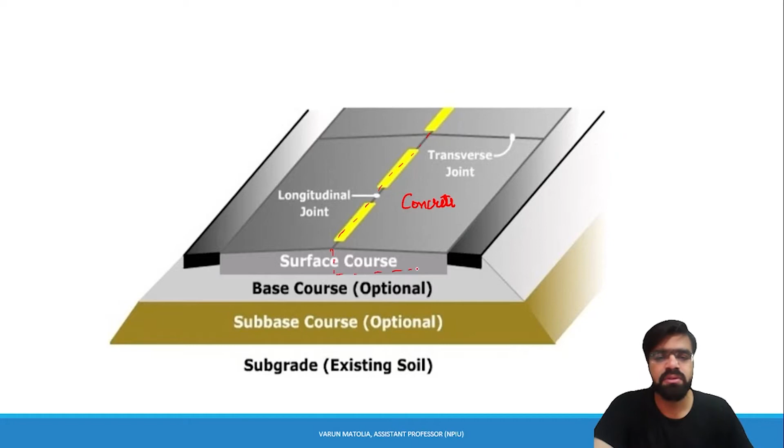The diagram which you can see here shows the rigid pavement. As you can see, a concrete slab is placed here. This is a concrete slab. It is placed over

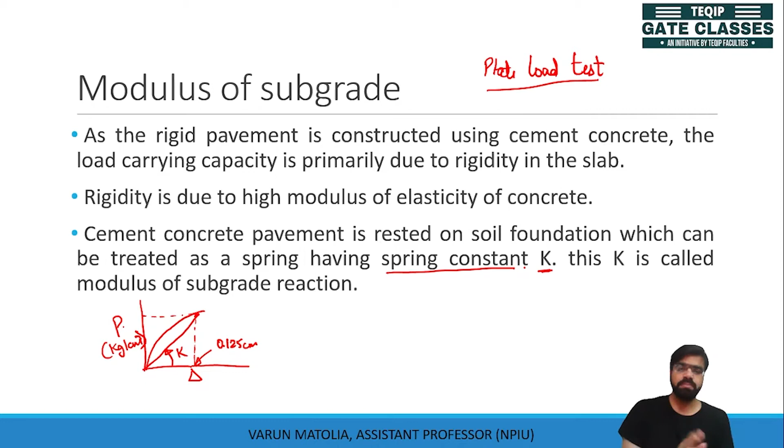This K value acts as a spring constant. We consider that our subgrade is a dense liquid and we consider it as a spring. If you apply load, there will be deflection. So what is the spring constant of the spring? This is denoted by the K value, which is known as modulus of subgrade reaction.

Now this K value can be calculated as P divided by 0.125. The unit of this K is kilogram per cubic centimeter. So this is what K is, modulus of subgrade reaction. This is a very important parameter and we will use this parameter in design of rigid pavement.

We have already seen different characteristics of this parameter in plate load test. We know that plate load test is done on a 75 centimeter diameter plate. If we use a different diameter plate, how can I calculate this K value for that different diameter plate? These things I already know from plate load test. If you want to revise, you can go back to the lecture and revise it, then come back here to use this parameter in design of rigid pavement.

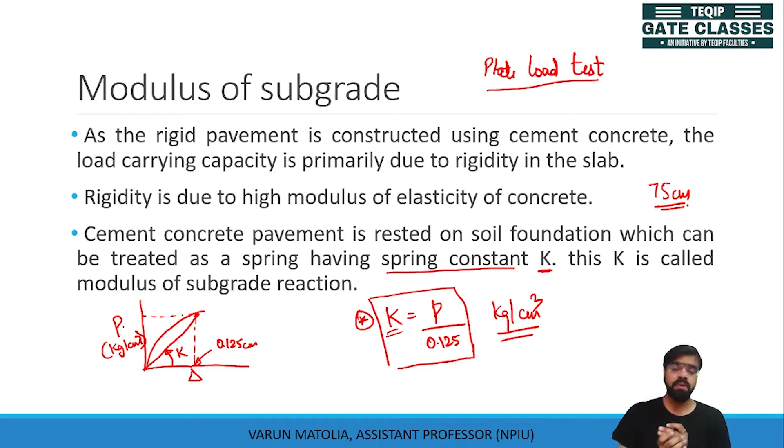Then another parameter is radius of relative stiffness.

It is considered that whatever deformation is occurring in the slab is equivalent to the deformation on the subgrade. Jitni deformation subgrade ke upar ho rahi hai, utni hi slab ke upar ho rahi hai.

So the relation between these characteristics is defined in terms of relative stiffness. The relative stiffness of slab with respect to subgrade is represented by radius of relative stiffness, and the radius of relative stiffness value is here.

We know that stiffness of slab can be represented by this formula. If we compare it with, or equate it with this stiffness value, then we can get the radius of relative stiffness. So L will be equal to EH cube divided by 12K into 1 minus mu square, raised to power 1 by 4. Here what is E?

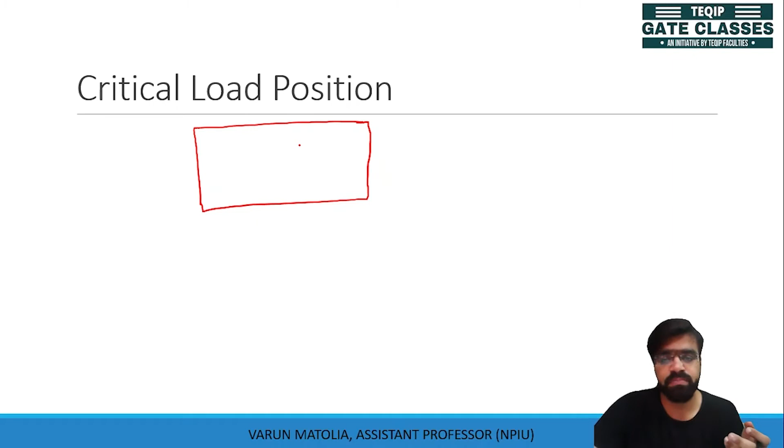In the interior, there are few locations. First one is the interior of the slab, there will be certain kind of load which will be maximum. Then there are edges and corners. Their critical positions or critical load positions are: interior loading, edge loading, and corner loading. So we will consider these three locations for calculating the critical stresses, and using those critical stresses we will design our pavement.

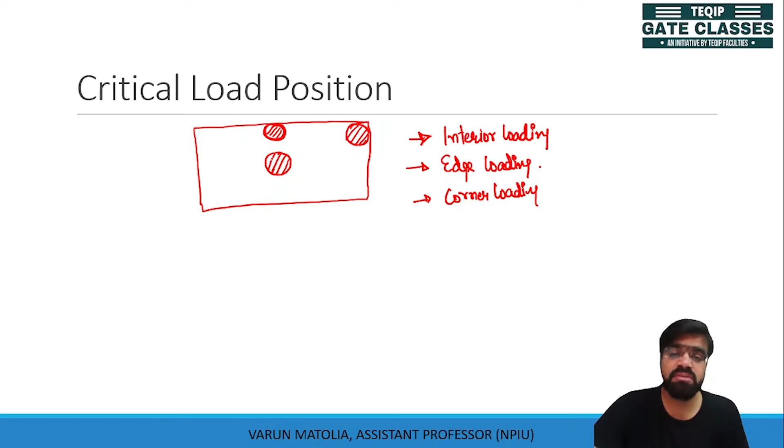As we see in the pavement, there is only a small area which resists the bending moment. So this small area which resists the bending moment is defined in terms of radius of resisting section. So the radius of resisting section, another parameter which we will use in design of rigid pavement, is defined in terms of B.

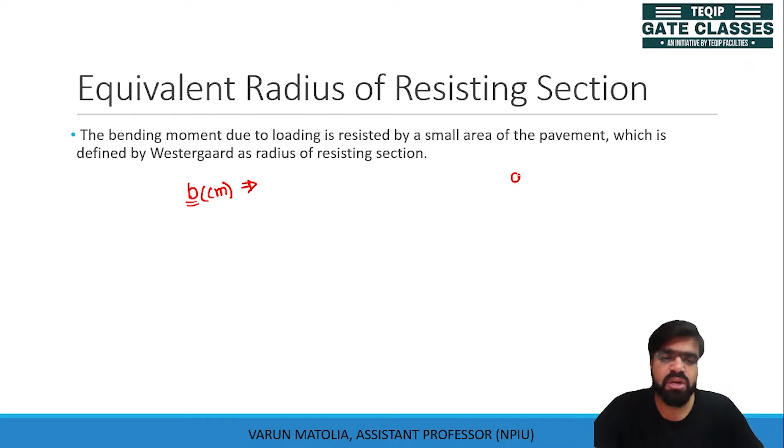This radius of resisting section depends on your radius of contact area. If this radius of contact area is less than 1.724 times your thickness of slab, then we will use this first formula, which says it equals 1.6 a square plus h square, minus 0.675 times h. If it is not the case, means if a is equal to or more than 1.724 times h, then your radius of resisting section will be equivalent to your a value.

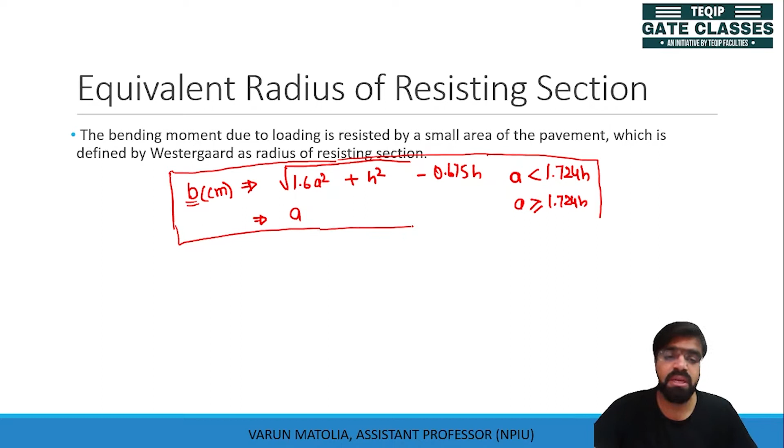This is another important parameter which you should remember. There will be direct questions on these parameters. You may have an a value and an h value, and you will be asked to calculate your radius of resisting section. So first you need to check whether your condition lies in this category or this category. Whatever the category, you can choose the formula and calculate the radius of resisting section.

Now let us discuss about the stresses. What type of stresses do we see in a pavement? There are two types of stresses. One is vehicular stress because of the wheel load. Another one is climatic stress because of the change in temperature.

The temperature change may be observed daily, as daily temperature variation. This means there will be higher temperature on the top surface in the daytime, and in the night time there will be comparatively low temperature on the top surface as compared to the bottom surface. So this creates a temperature differential between your pavement top surface and bottom surface. Because of this differential, there will be differential stresses, meaning different stresses.

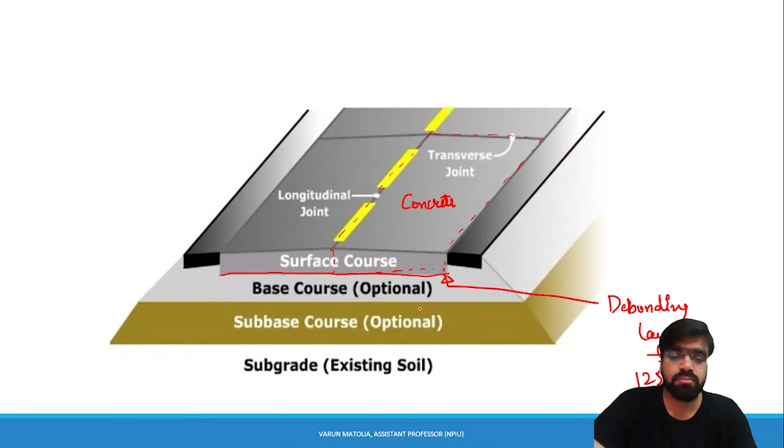Warping stress is because of the daily temperature variation, whereas we know that in summer the temperature is comparatively high versus winter. So there will be temperature variation in terms of seasons, and that is known as frictional stress.

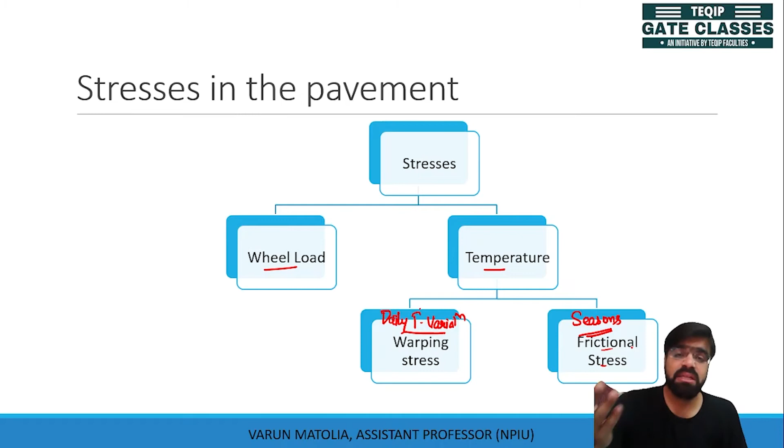Now we have considered that there are three critical conditions: interior, edges, and corners. Let us discuss the load condition if wheel load is applied here. Let us first consider the interior point. If load or wheel is applying the load here, this beam will bend this way. Here you can see, because of this bending, there is compression on the top and tension on the bottom.

So we will say, because of your vehicular load, there will be compression on the top and tension on the bottom in the interior slab. What is the critical stress here? Compression is never a problem in concrete, but tension is. So we are looking at the tensile stresses which generate due to various load combinations.

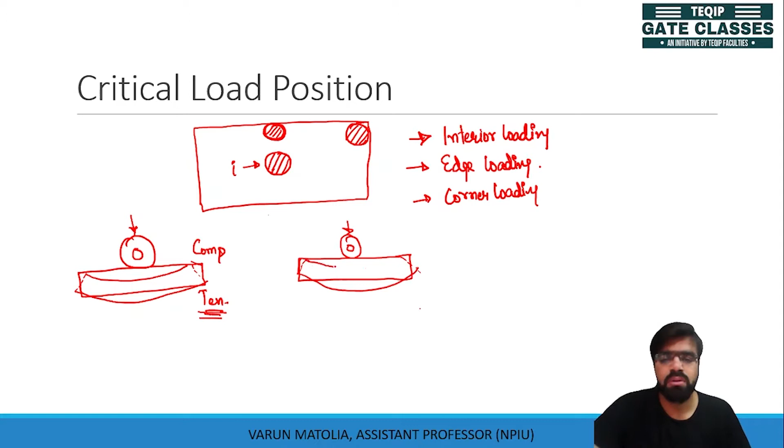Looking at the edge, if my wheel is at the edge, the scenario will be same: there will be bending, compression at the top and tension at the bottom. This is your interior area, this is your edges.

But at the corners, if wheel load acts on the corners, it will bend like this, similar to a cantilever, because they are not continuous, they are not held anywhere. So there will be tension on the top and compression at the bottom.

So in this case, we can see the compression and the tension, so we are looking at the tension value. This tensile stress can be calculated by these relationships provided by Westergaard.

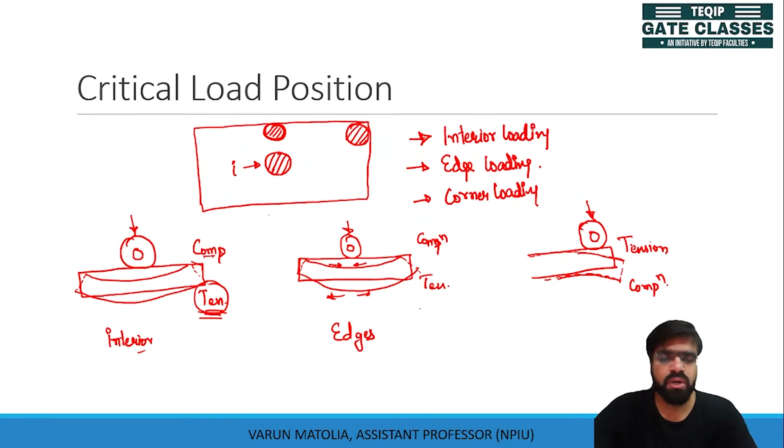Then at the edges, it is in the bottom surface. Why bottom? Because tension is at the bottom surface of the slab. The bottom.

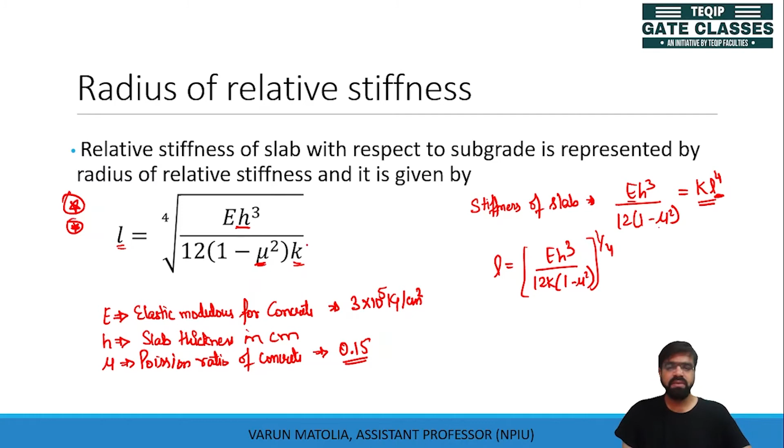We know that in this equation there is no modulus of subgrade reaction directly, but this value L uses the K value for calculation, the radius of relative stiffness. So how we will describe the relation between the modulus of subgrade reaction, in terms of L, with your stresses - this is important. So better you remember all these formulas so that these kind of relationships can be easily solved in your examination.

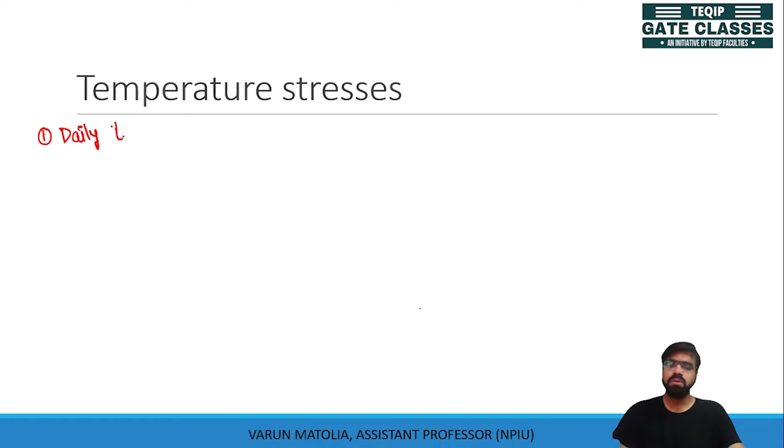Then there are temperature stresses. We know that temperature stresses are of two types. First one is your daily temperature stress, this is due to temperature differential at the slab surface. What happens is a slab, and it is daytime.

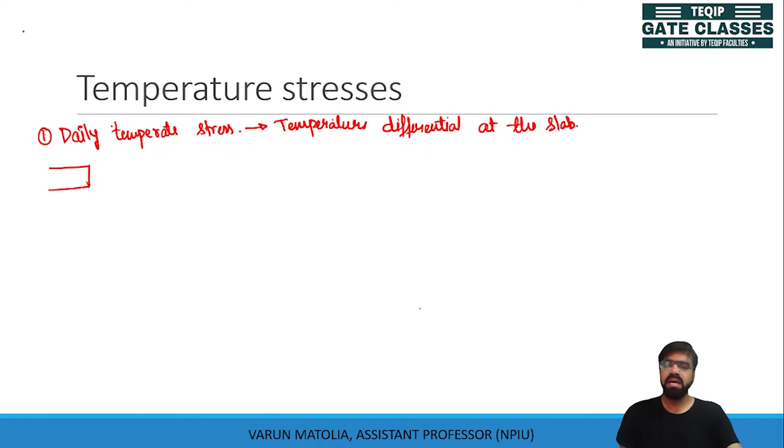Temperature at top will be higher because of the sun, and comparatively the temperature variation will look like this. There's T top temperature at the top, T bottom temperature at the bottom, and there is some difference in these temperatures, and the difference between T top minus T bottom is known as temperature differential. So because of this temperature difference from top to bottom, these stresses generate.

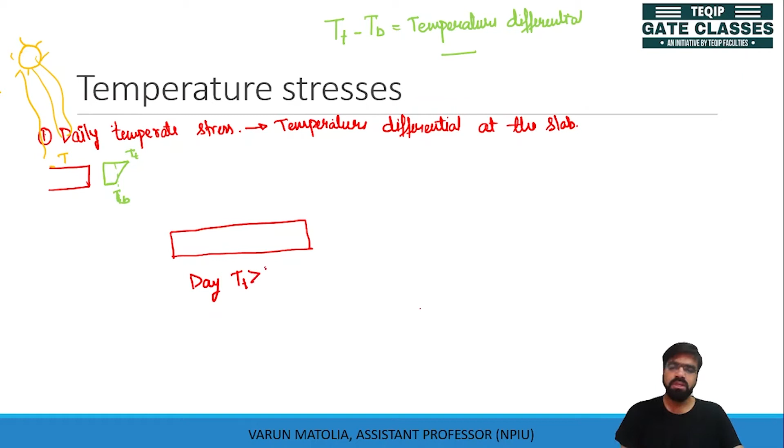Now let us see why these stresses generate. If I have a slab, let us say this is my slab, this is daytime. For this day, the temperature at top will be more than temperature at bottom. Where there is higher temperature, there is expansion. So at the top, there will be expansion. Comparatively, at the bottom, there will be expansion, but in less amount. So this beam will bend in the plane like this.

Because if it is higher temperature at the top, there will be more expansion at the top as compared to the bottom. So because of this shape, what my center would like to do is come back because of its weight, and because of this weight, resistance to this expansion occurs.

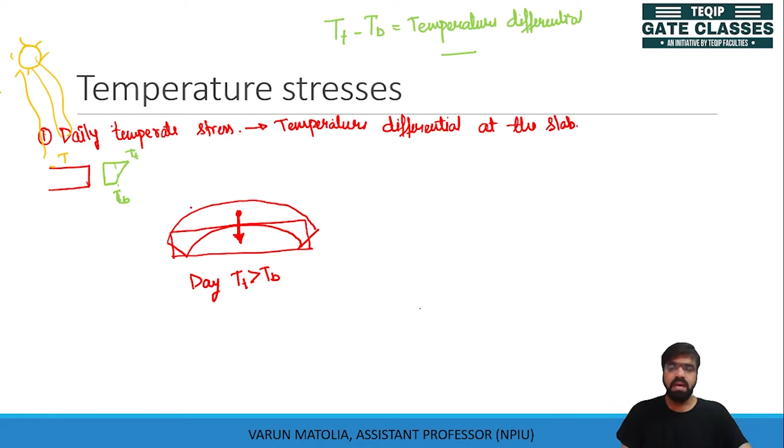There will be compression at the top. And at the bottom, there will be tension, because we want to get back to the original shape. So in a daytime condition, there will be compression at the top and tension at the bottom.

If it is night time, this slab has a reverse temperature gradient. The temperature at the top will actually be less than at the bottom. With the sun going down, the temperature at the surface will also decrease, but it will not affect directly the temperature at the bottom. The bottom temperature relative to the top will change slowly. Dheere dheere change hoga. As night time approaches and the sun reduces, the top surface temperature becomes lower compared to the bottom. Now what will occur?

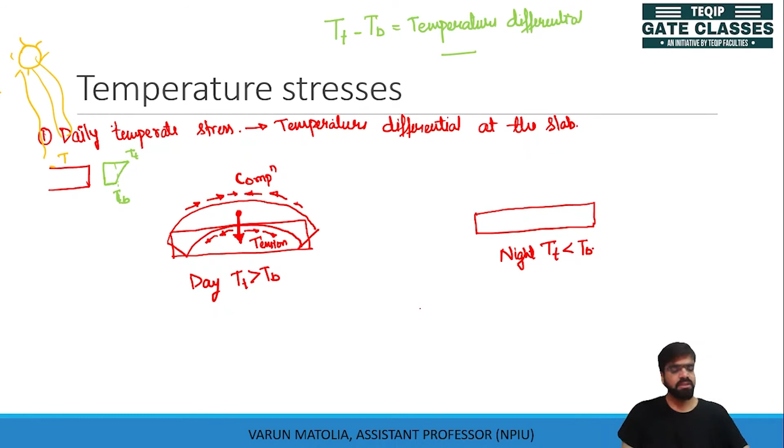The bottom will expand. How? The bottom will expand in such a way that it will form this kind of shape.

Because the temperature at the bottom is higher, the expansion at the bottom surface will be higher, and this will be resisted by the weight of this pavement. This weight will try to compress the bottom so as to bring it back to the original position, and will try to provide tension at the top. So there will be tension at the top and compression at the bottom.

These types of stresses, which are generated due to daily variation, are known as warping stresses.

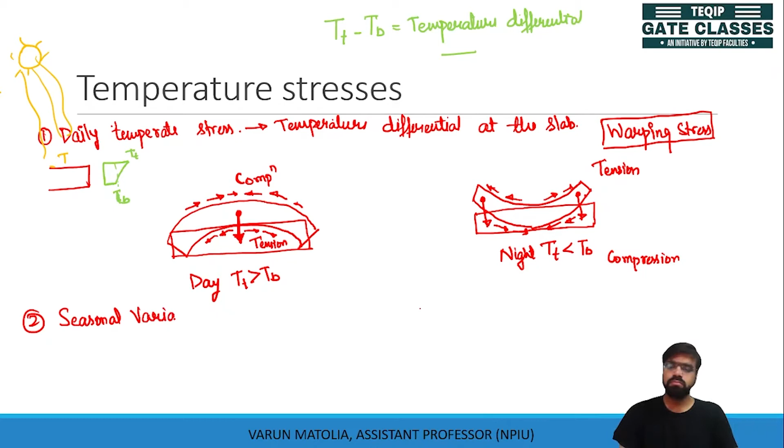The other type of stress which we see is due to seasonal variation of temperature. Here there is no differential in the slab. The complete slab will either expand or contract. There will not be any differential between the top surface and the bottom surface, but either compression or tension in the complete slab. Now let's look at why this compression or tension occurs.

This is my slab, placed over a granular surface. Now with increase in temperature, my slab will try to expand. So I am talking about summer. We know that summer has comparatively higher temperature, so in summer this slab will try to expand.

But as we have placed this slab on a granular material, there will be friction, and friction will try to stop this expansion. Whenever there is resistance in expansion, there is generation of stresses. The slab is trying to move out, but the friction is resisting it in the opposite direction. So there will be compressive stresses.

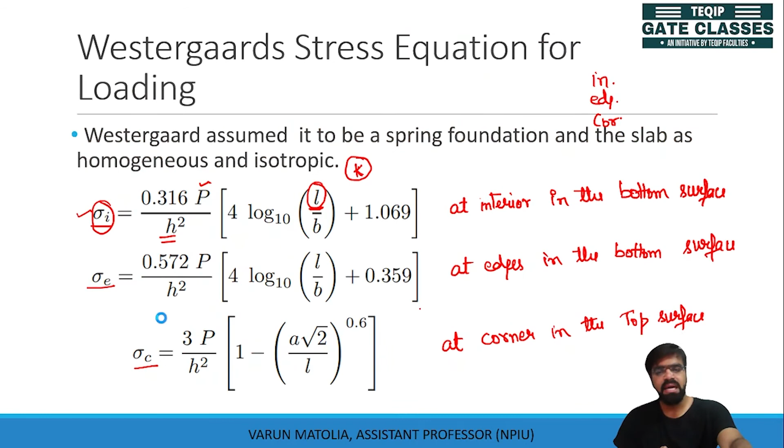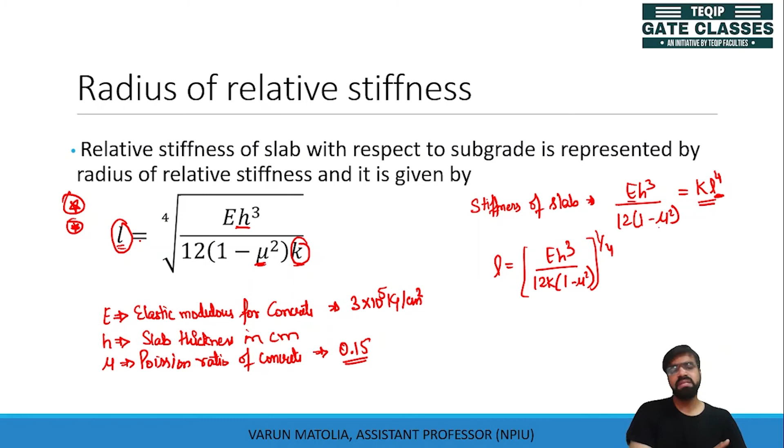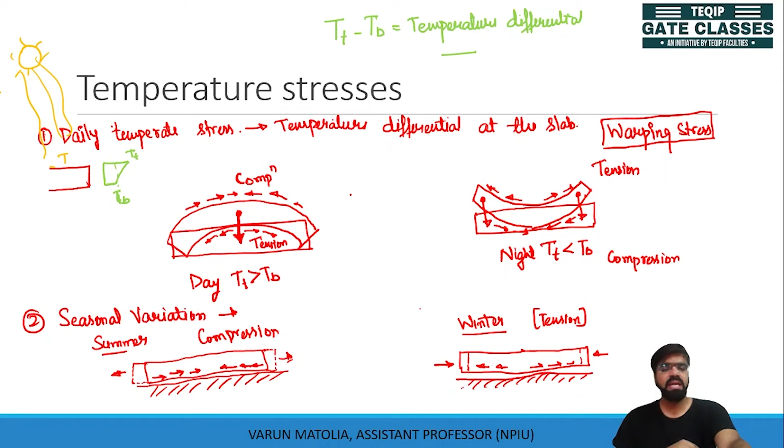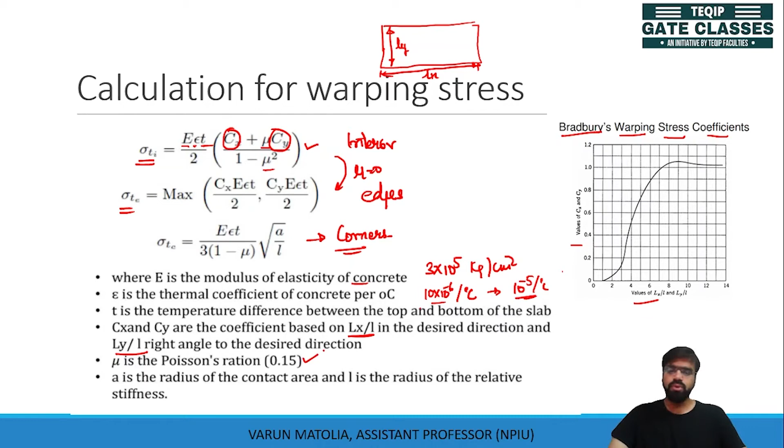You should remember that the value of Poisson's ratio is taken as 0.15. Now let's talk about the temperature differential. The maximum temperature differential occurs during the day in the spring and summer months, because the temperature at the top is very high while the temperature at the bottom is relatively cool. During midday in summer, the surface of the slab is exposed to sun and warms faster than the subgrade, which is relatively cooler. This creates a temperature differential.

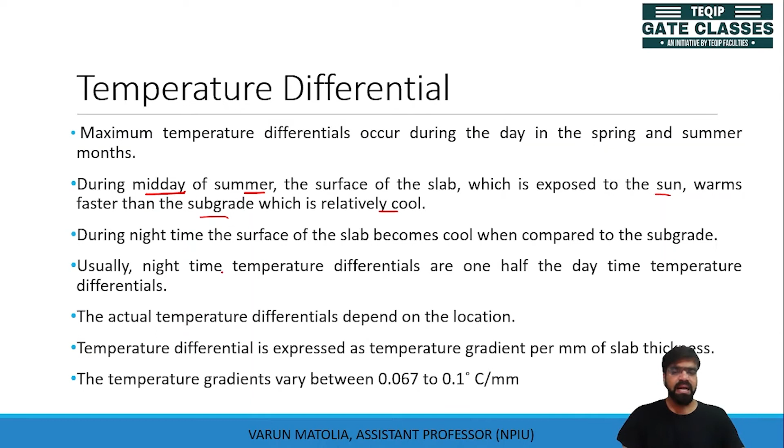At night the surface becomes cooler compared to the subgrade, and because of this variation there is a temperature differential. It is said that at night the temperature differentials are one half the daytime temperature difference.

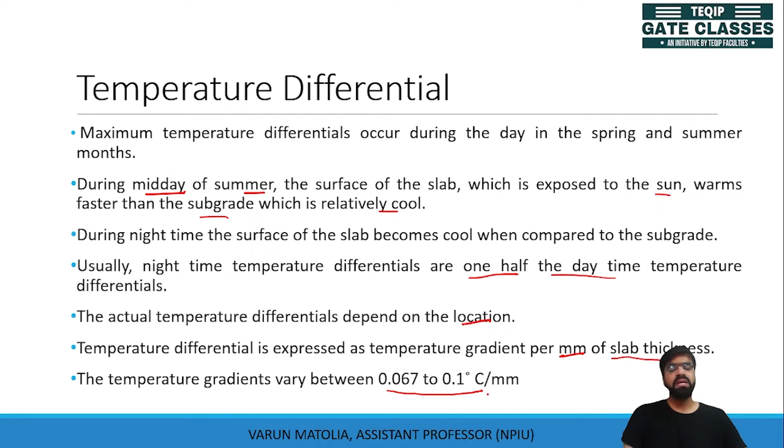The actual temperature differential depends on the location, because temperature variation also depends on the location. The temperature differential is expressed as temperature gradient per mm of thickness of slab, and it varies between 0.067 to 0.1 degrees Celsius per mm, for different thickness and different locations.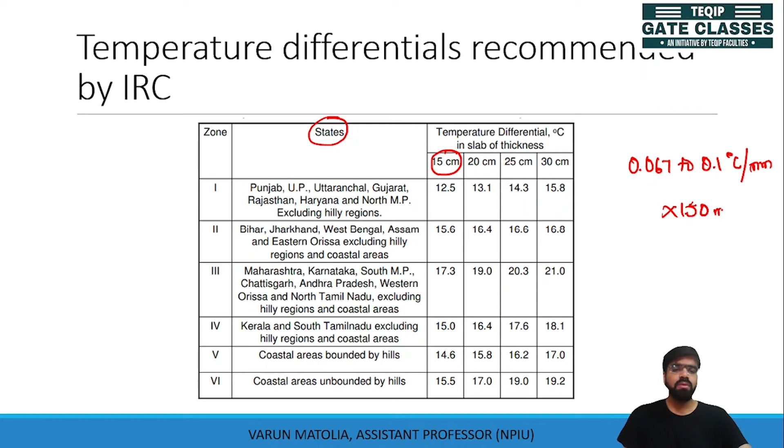For various thicknesses, we multiply this value by the thickness in mm, and we can get the differentials from the code. This provision is provided in IRC 58. We have the latest version, IRC 58 of 2015, so this design is based on IRC 58. For all the states and different areas, we have the temperature differential for different thicknesses of slabs, which will help you calculate the warping stress.

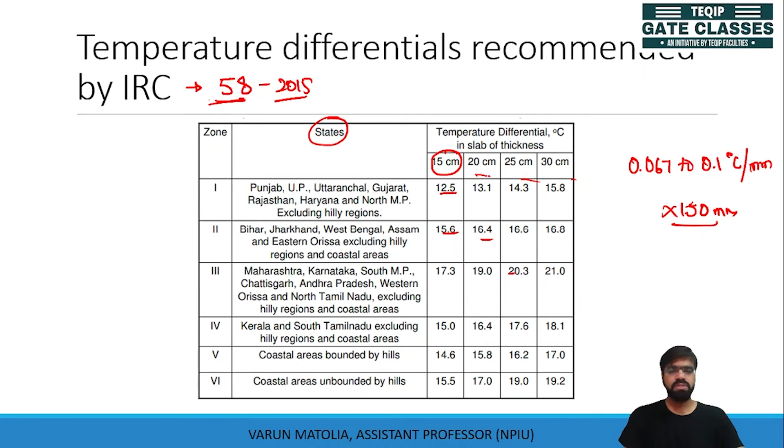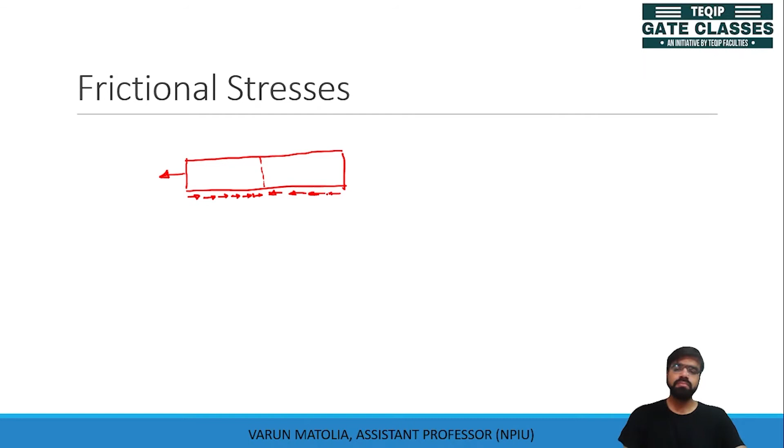Then there are frictional stresses, which we have already discussed. The slab, with increase in temperature in summer, tries to expand, but there is restriction. It wants to expand, but is restrained. For summer there are compressive stresses, and it is considered that these stresses are studied for half of the length, because the other half has a similar type of compressive stress.

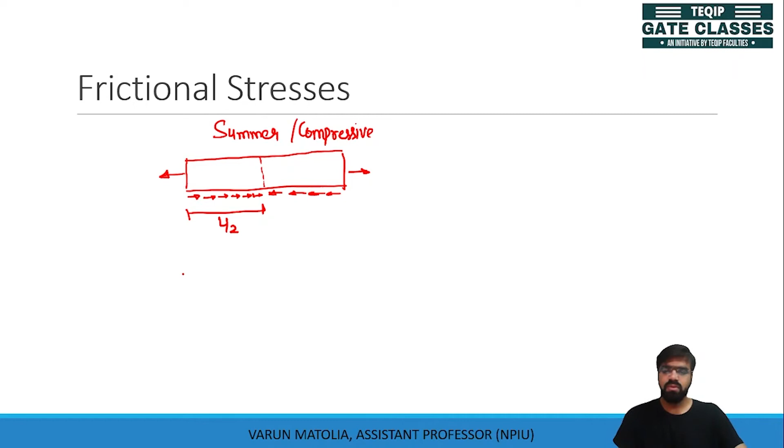This is due to the seasonal variation of temperature. Now, if we want to calculate this variation, we can say that the expansion or tensile stress in the pavement is actually equal to the friction applied. So the friction value can be given by M, and this is resisted by, or equivalent to, the strength of this section in tension.

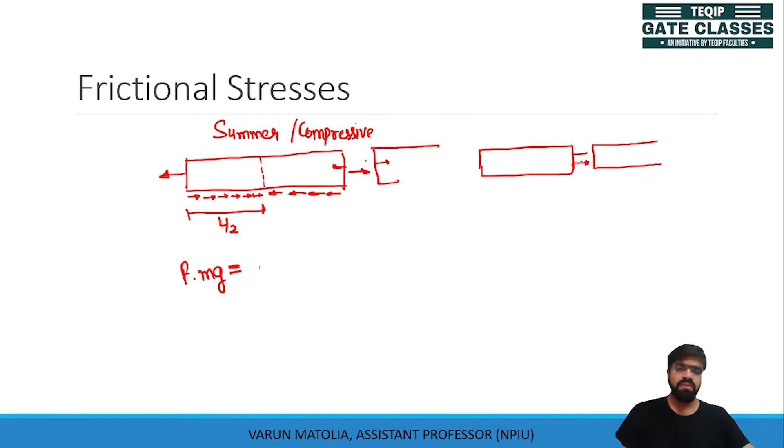If we consider this section, it will try to contract, and if there is another section nearby, it will also try to contract. In winter they contract, in summer they try to expand. So this expansion and contraction will generate tensile forces. The frictional resistance is equal to these tensile forces, or the tensile strength of the pavement, which is equal to the permissible tensile stress on the surface.

Here, the permissible tensile stress on the surface is multiplied by the surface area, that is, the width of the pavement. So the friction value is the friction coefficient multiplied by the total area, or the friction coefficient multiplied by the weight. The weight can be calculated by multiplying the volume with the unit weight. The volume is the width multiplied by the height multiplied by half of the length, and these are the stresses occurring here.

So this formula can be used to calculate the frictional stresses - frictional stresses in corners, in interior, and at the edges. We are very much interested in the tensile stresses, which occur during this.

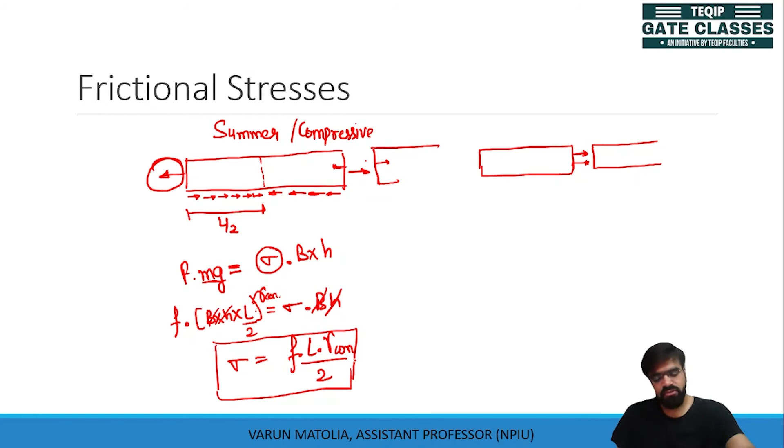When do these tensile stresses occur? These occur during the winters when the object or the pavement is trying to contract. That's why we provide contraction joints.

Now let us see various load combinations and find which combination is critical for design. Due to wheel load, we know that the interior has minimum stress because it is continuous in both directions, whereas corners, which have tension at the top, have maximum stress because of the discontinuity, and the edges have an intermediate range.

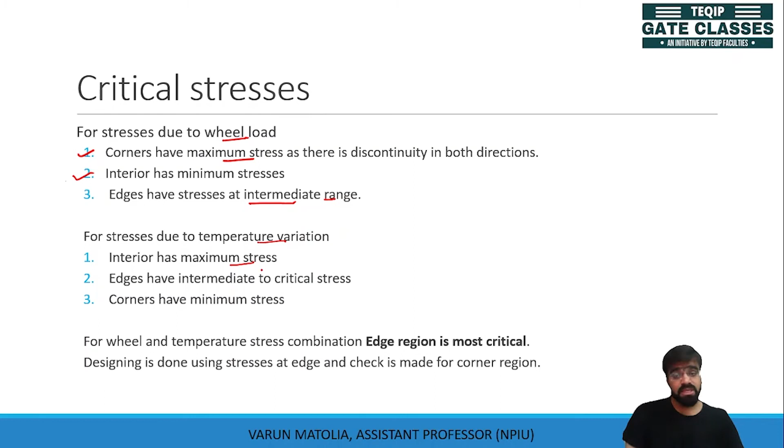While for temperature variation, the interior has maximum stress. The stress variation compared to temperature is like this: at the corners, the temperature stresses are usually close to zero, and at the interior it is maximum. So corners have minimum temperature stresses, and interiors have maximum temperature stresses.

So in order to design a pavement, we should consider the edge region because it has intermediate stress in terms of both temperature and wheel load. So we consider the combination of wheel load and temperature stresses to be critical for the edge region. We design it for the edge region, but we check it for the corner region so that all combinations are safe.

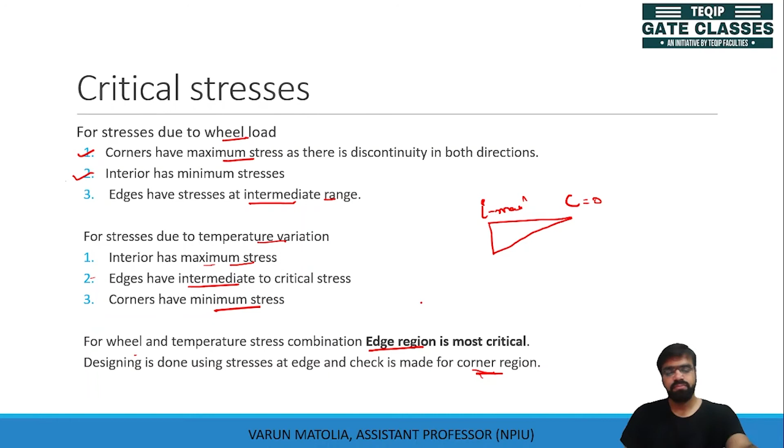Let us discuss various combinations and find out which combination is the most critical. For locations - edge, interior and corner - let us discuss the load stresses due to wheel load. At the edges, we know that at the top it is compression, at the bottom it is tension.

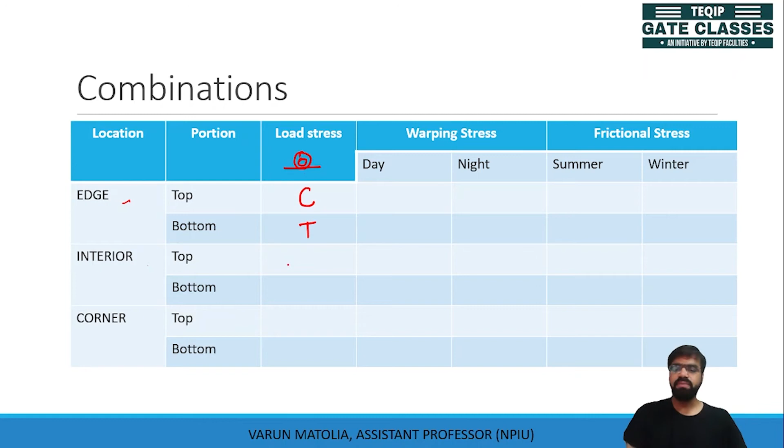Similarly for the interior, it is compression at the top and tension at the bottom. But for the corners, where it behaves like a cantilever, there is tension at the top and compression at the bottom.

For warping stresses at daytime, there will be similar stress on top for edge, interior and corner. At daytime, the top surface is expanded and the weight is trying to compress it. So we have compression at the top during the day in edge, interior and corner, and tension at the bottom.

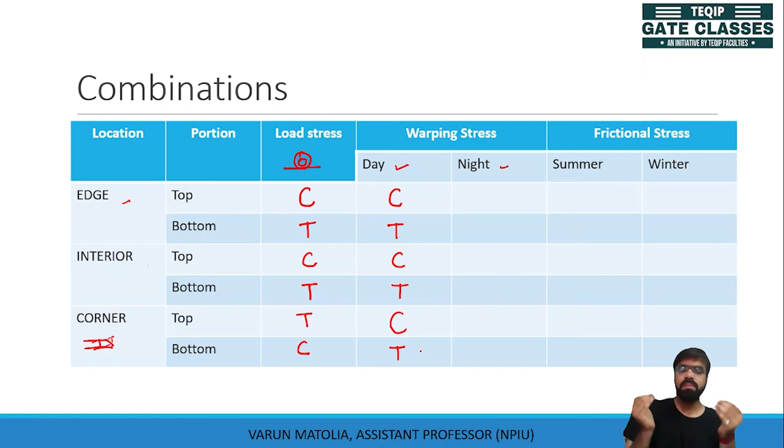At night time, we know that the temperature differential is reversed. The temperature is higher at the subgrade level and comparatively lower at the surface level. So at night, the top surface will have tension because the bottom is expanded, and it will be compressed because of the load. So there will be tension at the top, compression at the bottom, for edge, interior, and corner.

Frictional stresses are similar in all three areas. If the slab is trying to expand, the friction is trying to compress it. So for summers, there will be compression throughout. And for winters, there will be tension throughout.

So we need to find the load condition which is critical - we want to see where there is always tension. We also know that at corners there are no or very negligible frictional stresses, so we can ignore these values.

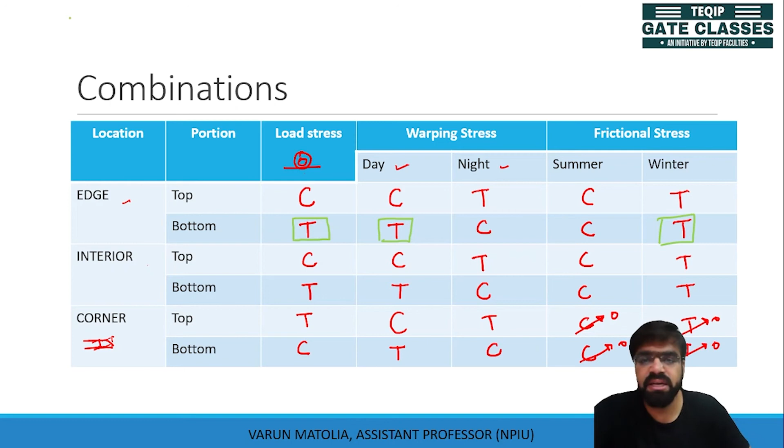And from these combinations, we can say that for edges, bottom, bottom, and bottom. So we can write that for interior and for edges, the critical load combination is this load stress at edge, at bottom, plus warping stress at day.

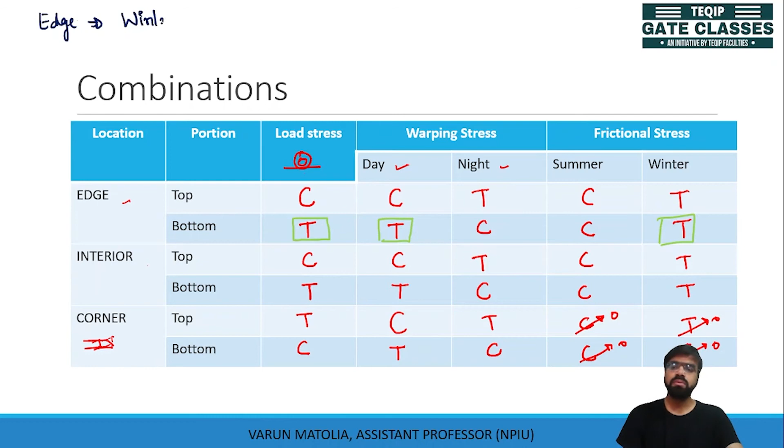Or we can write the combination for edge as a winter daytime stress will be critical. So this is the most critical combination for edges.

If we talk about the interior, the most critical combination is the same, in a winter's day. In a winter's day, there is tension at the bottom because of loading also. So this combination holds good for the interior portion too.

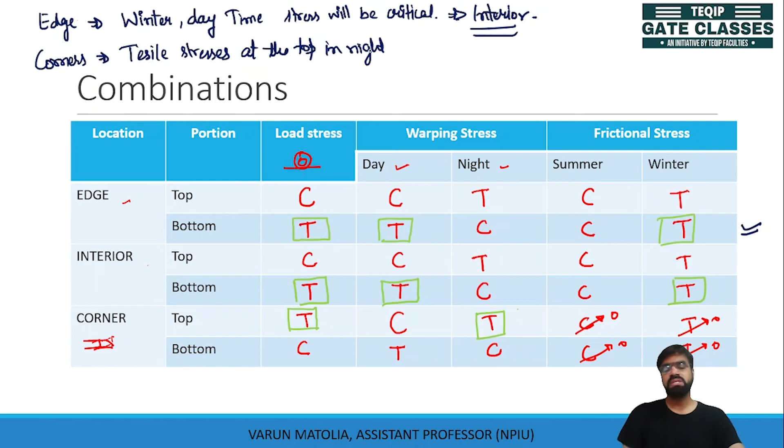Finally, for the corners, we have the critical combination as tension at the top in any night - corners have tensile stresses at the top at night. If you want to consider, you can say it is winter, but as the frictional stresses are negligible, you can ignore it and write this combination.

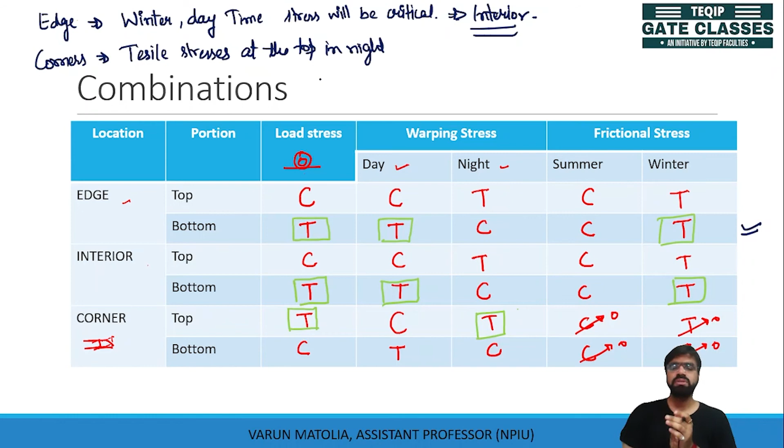In transverse joints, we have expansion joints, which are generally provided at around 140 meters.

Then there is a contraction joint, which are usually provided at a distance of 4.5 meters. And then there are construction joints. Whenever you stop the construction of a day and then begin the construction for next day, you provide a joint.

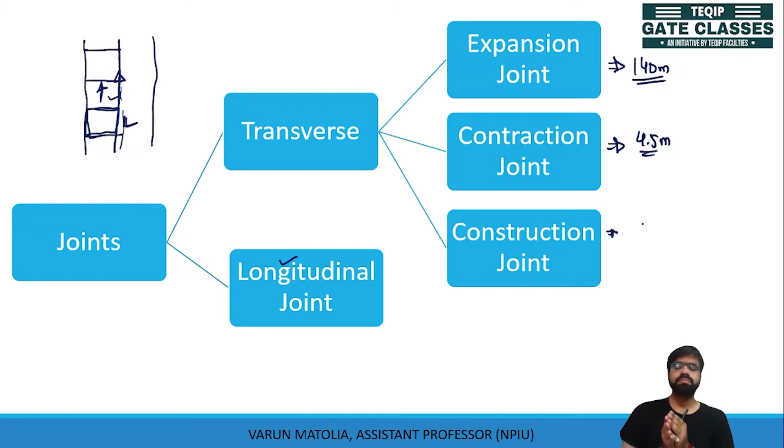Expansion joint provides you a cushion or space in order to allow the expansion of the slab. Expansion joints are designed such a way that it allows the expansion and allows the compression of the filler material into this joint.

Contraction joints are actually not proper joints. These are the locations where localization of cracks are done. We provide half a crack in the slab so that the cracks get generated from this point only, and fill this with filler so that the cracks generate at this location only, because somewhere there will be a crack. So let us provide a location where there should be a crack, and not allow any other location to generate a contraction crack.

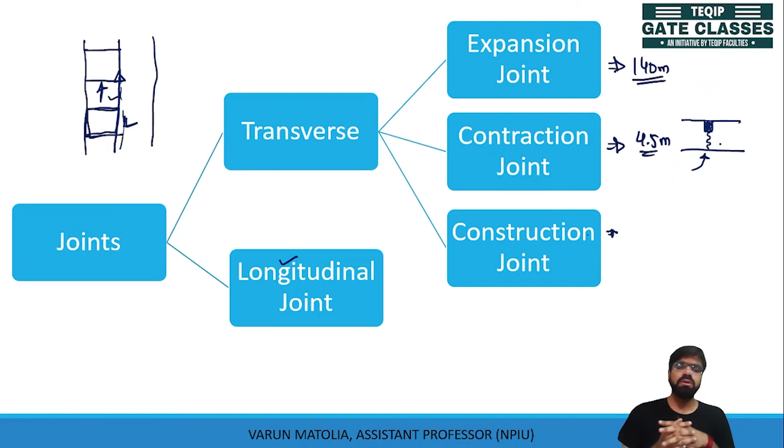In this diagram, you can see this is the direction of traffic. In the direction of traffic, these are your longitudinal joints. These are your transverse joints. Expansion joints are separated with a maximum separation of around 140 m. There are joints provided in between the expansion joints, known as your contraction joints, which have a spacing of around 4.5 meters.

There are bars which are provided in the longitudinal and the expansion joints. The bars which are provided in the longitudinal joints are known as your tie bars.

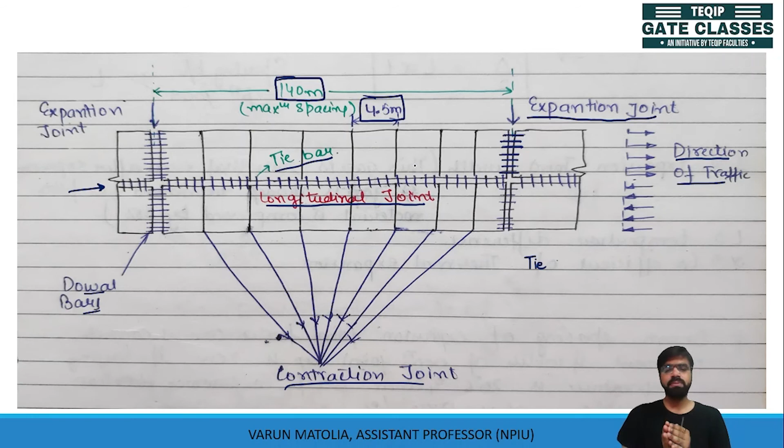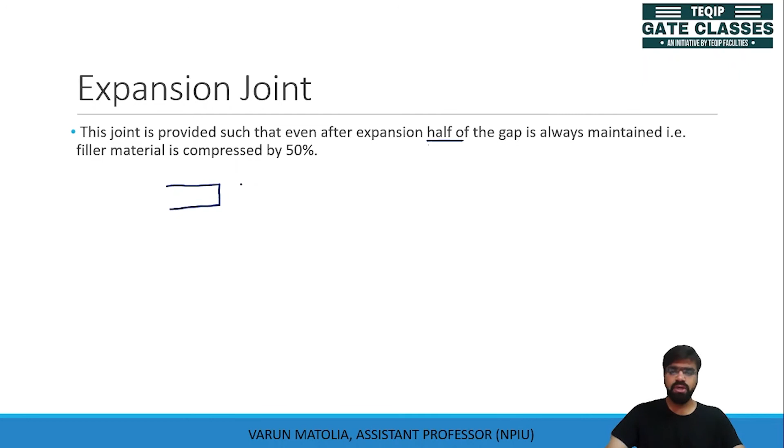So let us discuss about these joints and bars. Now the expansion joint is designed in order to provide expansion which will fill the gap, or fill half of the gap. Let us say this is your expansion joint provided between two slabs.

Definitely there will be a dowel bar, but right now we are not discussing about the dowel bar. Let us say this joint spacing is delta. We are allowing this space to be filled half, meaning 1/4 of expansion is allowed here and 1/4 expansion is allowed here. Still a gap of around delta by 2 will remain.

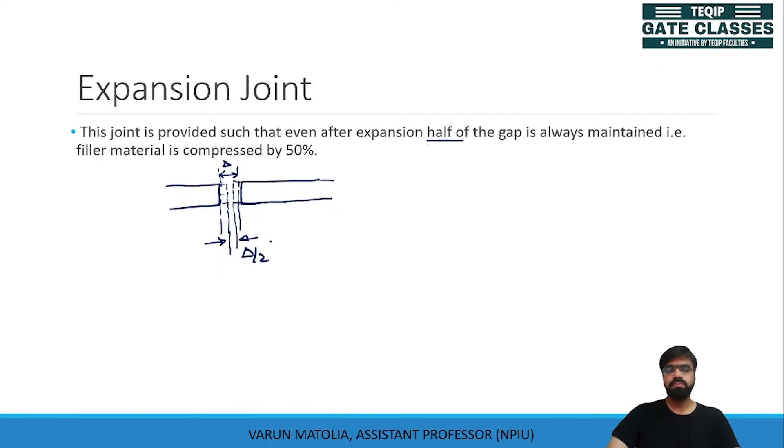We need to fill this gap with the filler material, some kind of polymer, some kind of rubber. So we will allow the compression of this filler material by half of its width. So we know that the change in this spacing will be delta by 4.

Now let us calculate. We know that the change in length because of temperature can be calculated as delta by 2. The change in length of the slab due to temperature is equal to L alpha T. This we know from strength of materials or mechanics of solids. So from here you can calculate the width or the opening of your expansion joint, or the distance between these expansion joints which are to be provided.

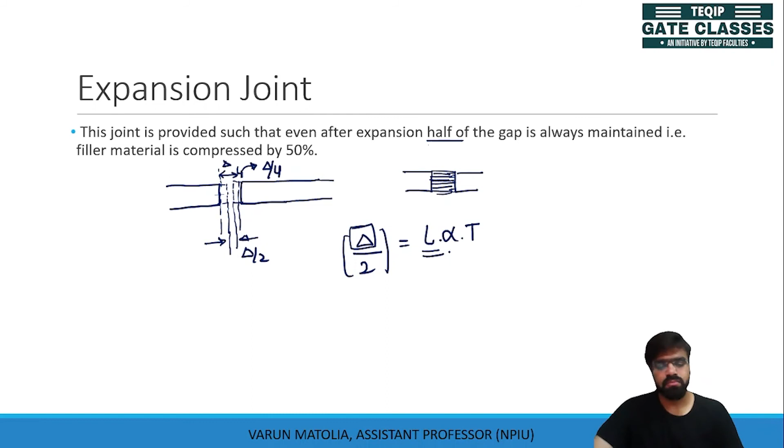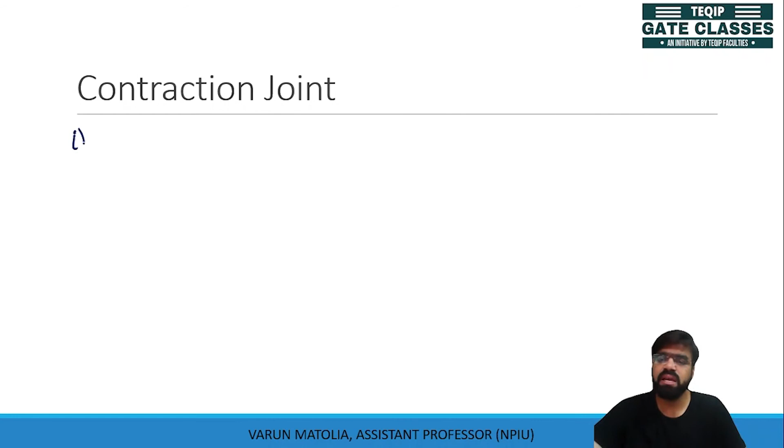So the next one is contraction joint. Contraction joints are provided in order to allow the contraction at a certain section. There are two conditions for contraction joint: one, if there is any reinforcement provided, or if there is no reinforcement provided. So let us say if no reinforcement is provided, no steel bars are provided.

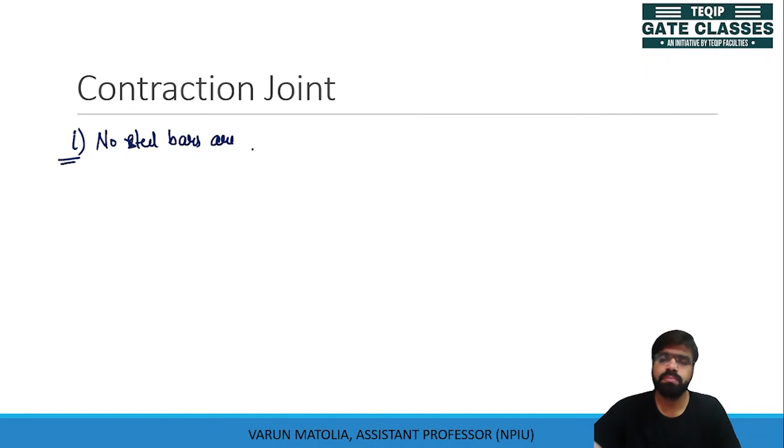If no steel bars are provided in a slab, it will crack from here. We want to calculate the length or the spacing where this crack is going to occur.

This crack, if there is contraction, means there is cause of tension at this location. We know that this tension will be resisted by friction. So how much tension is allowable?

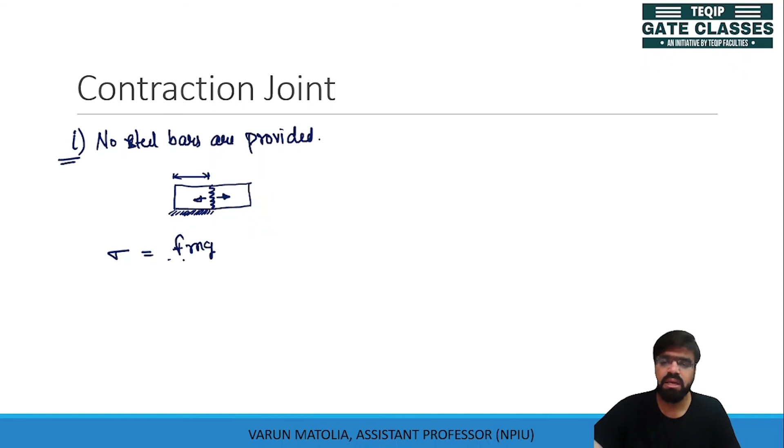This allowable tensile force in your concrete is resisted by your frictional force, frictional force by area. So this frictional force is acting at the bottom and this tensile force is acting at the surface.

Let us calculate. F is equals to volume into unit weight of your concrete. What is the volume? Volume is the total length between two cracks, this is the spacing length of your contraction joint, multiply the width and the height, multiply the unit weight of concrete.

The G is itself converted by density of concrete multiplied by G into unit weight. Don't get confused about this G. Here we have the area of this section, which is B cross H.

So we will substitute it, and this sigma value will be, okay, so this L here is L by 2, because we know that half of the concrete pavement is compressing from this direction and half is compressing from this direction. So the length of the effect of this friction will be applicable on half of the length. So this sigma value will be F multiplied by L by 2 into gamma C.

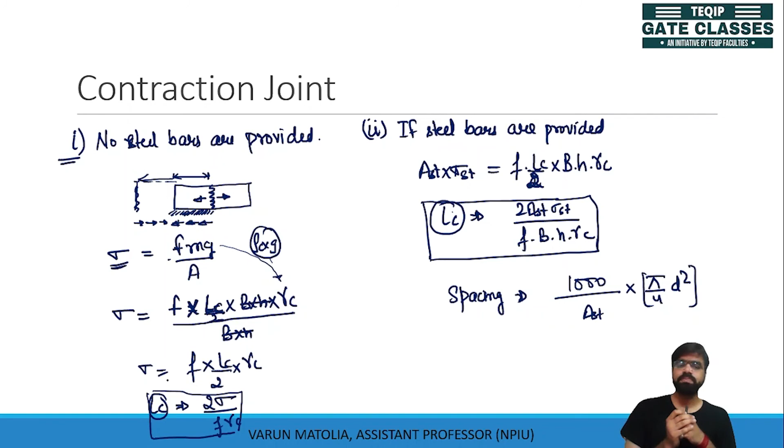The tie bars are provided in your longitudinal joints, and dowel bars are provided in your expansion joints. So let us discuss about the tie bars. Tie bars are actually provided in order to hook the two slabs together.

These are the two slabs. The tie bar will help to tie these together. So essentially these bars are provided as deformed bars.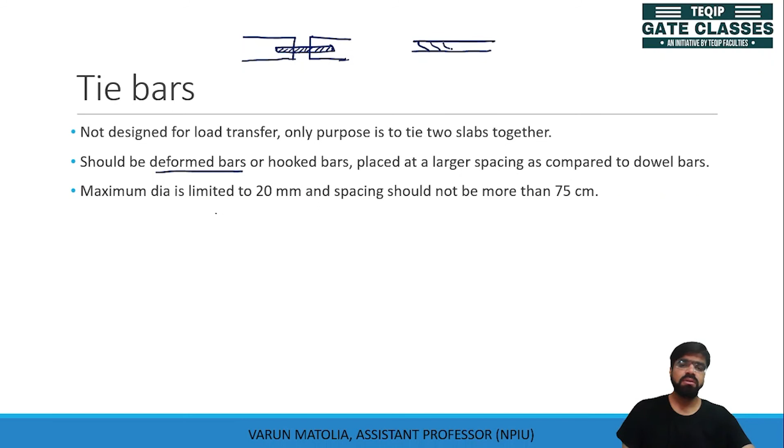When you will study RCC, you will learn about deformed bars. You have seen the TMT bars or general bars, reinforcement, which are used here and there. You will find these lines like this on the surface of your bar. This is known as a deformed bar.

If these lines are not provided, it is a smooth rod, then there will not be any surface bonding between your bar and your concrete. That's why these deformations are provided.

These are placed at a larger spacing as compared to dowel bars, because these are not your load distribution bars, and the maximum diameter is limited to 20 mm. The spacing should not be more than 75 centimeters.

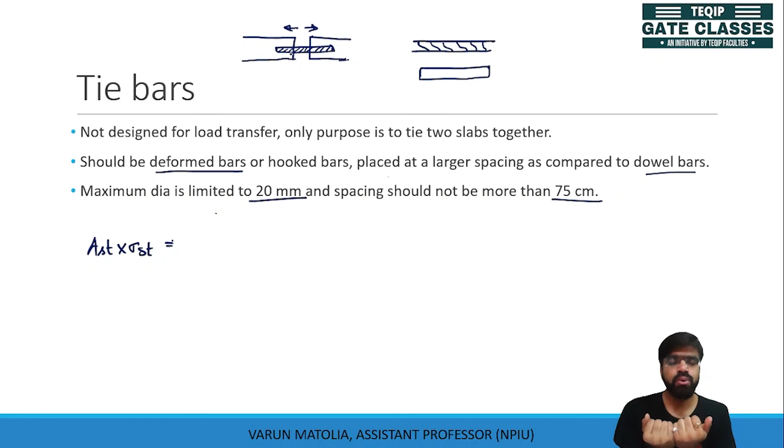So let us see how we can design these bars. A similar value, or similar direction, will be used in order to calculate your AST. This is resisted by the friction, because these are bonded, and the bonding will provide a grip, and due to contraction or expansion there will be variation in length.

Let us calculate this. For 1 meter length, how much steel can be provided? This volume, this is for the frictional coefficient. So you can calculate AST from here, the amount of steel which is to be used. You can further assume the diameter and calculate the number of bars which can be used in this arrangement.

Here the F value is very important. The F value which we are using, this is equals to 1.5. Already in transportation we have studied two F values earlier: one was friction between wheel and your surface in longitudinal direction, the other was friction between your wheel and the surface of pavement in lateral direction. And here this is the friction between your pavement or the concrete surface with the subgrade or your base.

Now if you want to calculate the length of the tie bar, this length of tie bar can be calculated as equals to 2 times of your development length.

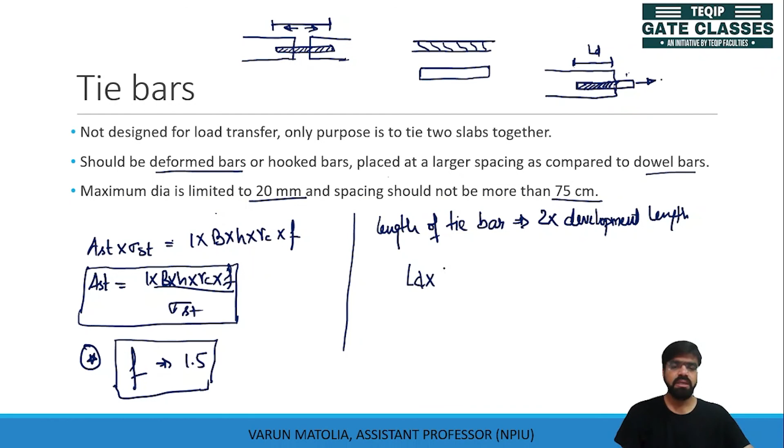Tensile stress or strength of bar and your bonding stresses. So your bonding stress is applicable on a length, this is LD, and on the circumference. If I am putting this bar into this concrete, this much length which is inside will provide the definite bond, so that if I stretch or provide a tension here, this does not come out.

There will be a condition when this steel will fail in tension or there is loosening in this bond. When this occurs simultaneously, then we say this is what we could achieve.

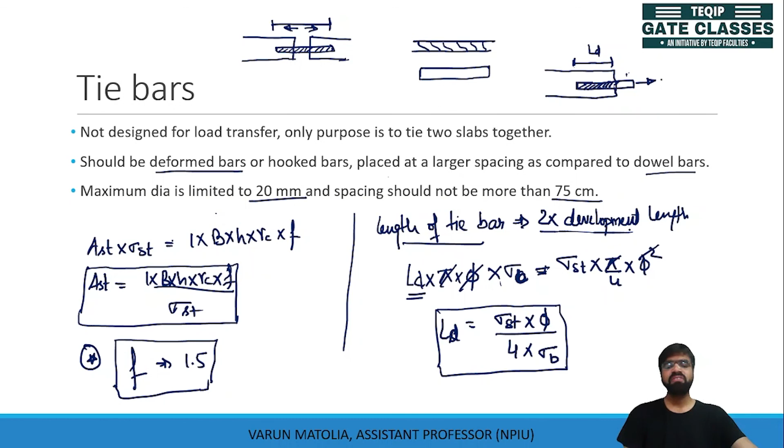Finally, let's discuss about the dowel bar. There is a proper design for dowel bar, but it is not required for GATE examination, because GATE will not ask the proper design, but the formulas are important.

For dowel bars, the purpose is to provide effective load distribution. Why are dowel bars provided? If it is a joint, dowel bars are provided at expansion joints.

My traffic flow is in this direction. If my wheel is here, this will move with a proper deflection. So this is the deflection which I can see because of this bar. Now, whenever this deflection occurs, there will be a lot of impact on this next pavement, and with time this will deteriorate.

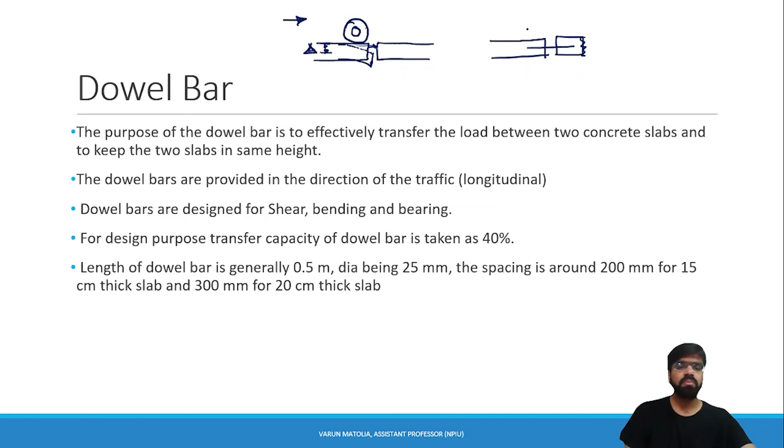So what we do, if this is delta, we try to provide this load equally distributed in this pavement, where if this loading occurs again, there will be comparable deformation in both the pavements. So the deflection is delta.

Now the deflection is delta by 2 here and delta by 2 here, and the load whatever is here, it is transferred.

The dowel bars are not bonded in both the slabs. It is bonded in one of the slabs, and in the other slab it is left loose with a kind of arrangement.

A filler is provided, finally a metal cap with cotton is provided, but it is loose here in order to allow for expansion. The expansion joints are provided in order to allow the expansion. If we bond this layer, there will not be expansion, there will be cracks.

So to allow that expansion, we have to provide it, and there should be load transfer also. It is considered that the load transfer is around 40% from the first slab to the second slab.

These bars are designed for shear, bending and bearing all the stresses. The maximum length of dowel bar is generally 0.5 meters. For a spacing of around 200 mm, the diameter can be taken as 25 mm, and for a spacing of around 300 mm, for a slab thickness of 20 centimeters...

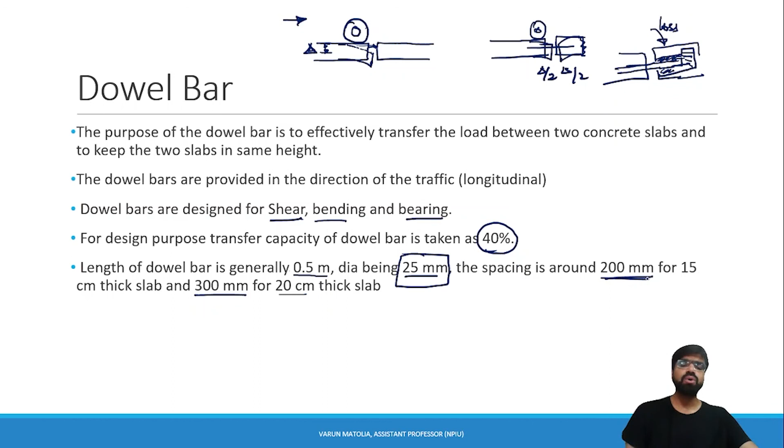The diameter can be taken as, for a 25 mm diameter, the spacing can be taken as 200 mm for a 15 centimeter thick slab, and for a 20 centimeter thick slab, the spacing can be taken as 300 mm.

So this is how you can design a dowel bar. You should remember these specifications which we have provided for dowel bar, and the requirement of dowel bar, the arrangement of dowel bar. The design itself will not be asked.

So this is enough from the rigid pavement design. We will see some of the practice questions in the next lecture from your pavement design and your pavement materials. So till then, thank you so much.